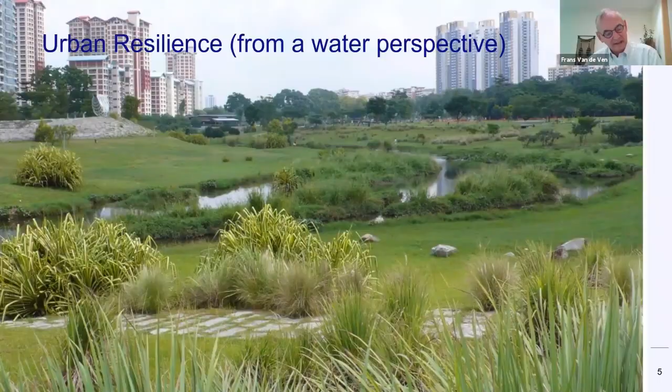Let's move on and first focus on what is urban resilience from a water perspective. Resilience in general is a wide word, but from a water perspective, it's the capability of a society to prevent or cope with the impacts of climate change, sea level rise, including its technical, institutional, economic, and cultural ability. So first of all, it focuses on climate change impacts, what is expected to happen to us. And it focuses on flood risk management, drought, water quality, the integrated design, inclusiveness. All these components are to be included in the total plan that we have to make for urban resilience.

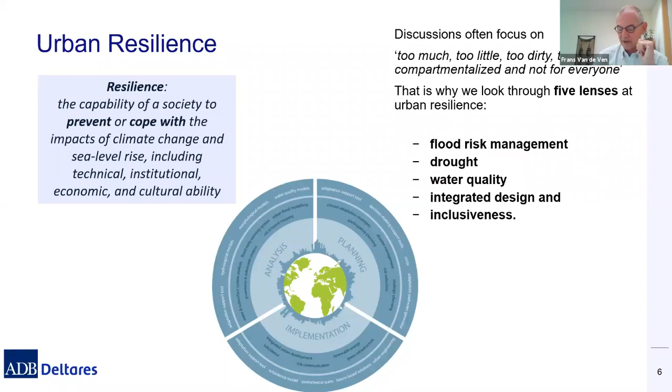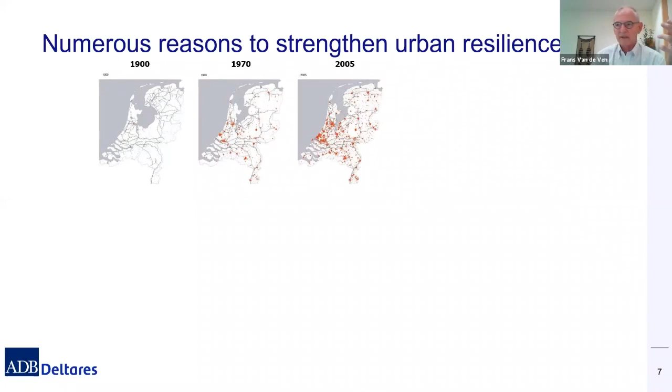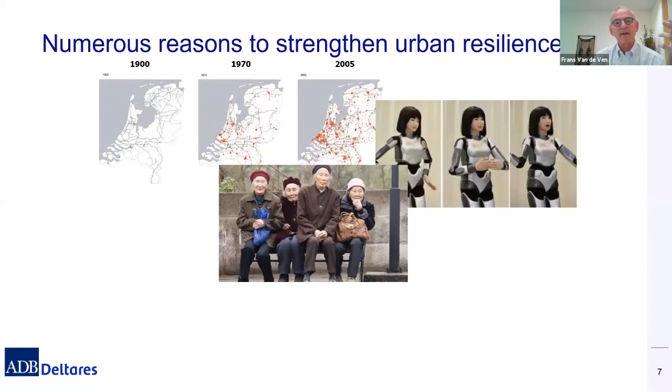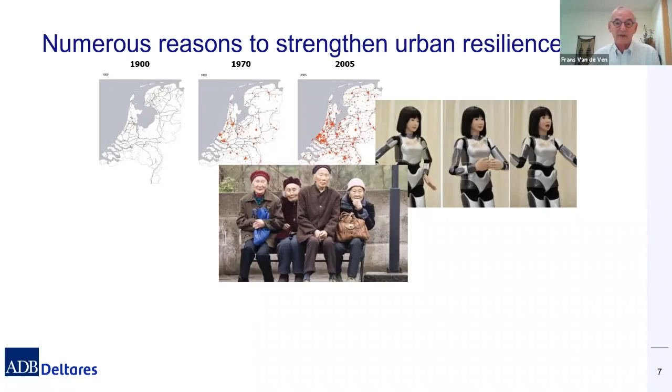But what makes urban resilience so important? Why is there a reason to strengthen that urban resilience? That, of course, starts with the whole issue of urbanization going on worldwide. Our cities are rapidly growing, but we also have an aging population to take care of - the demands will change over time. We have robotization going on in society. We're talking about smart society, about Internet of Things. That will definitely change the way we deal with our community - like this webinar is no longer a meeting in person, but it's broadcasted via Internet. We have a densification of the city going on - the city is becoming more and more dense.

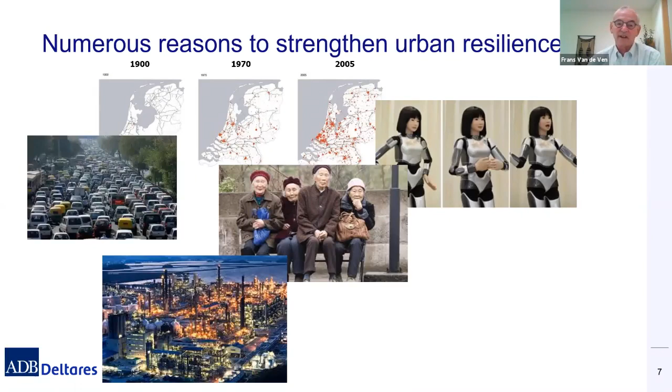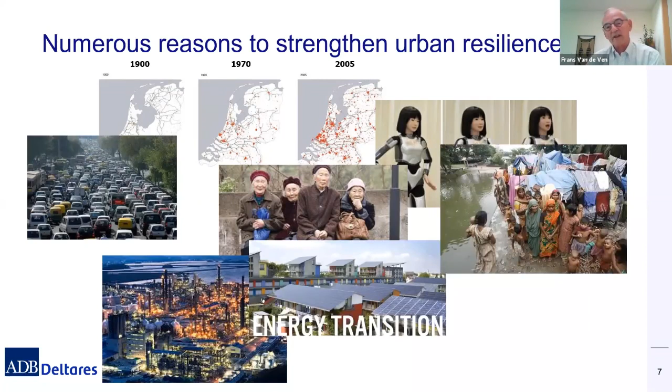To avoid urban sprawl, we start densifying our cities, but that makes the risks increase over time. Mobility is changing, as everyone knows. We have an energy transition to take care of. We have gender issues and income issues to take care of in urban resilience. And last but not least, there is a lack of money all around the world.

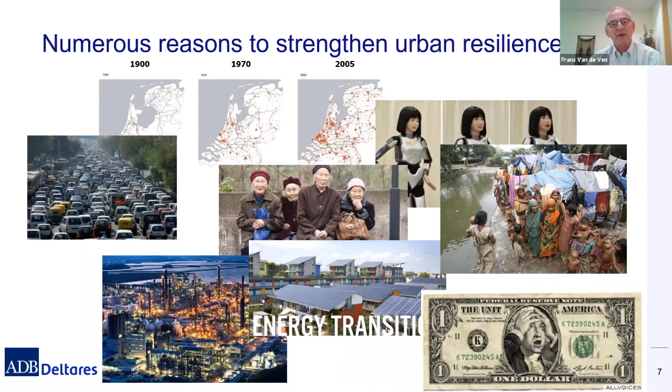The struggle for money is going on everywhere, so we have to be very careful with the budget. And of course, there is the issue of climate, not only climate change, but existing climate. We already suffer from flooding, river flooding, coastal flooding, heavy rainfall. We suffer from droughts, not only bringing dry gardens, but also threatening the stability of our levees, introducing land subsidence and so on. And we have that heat issue.

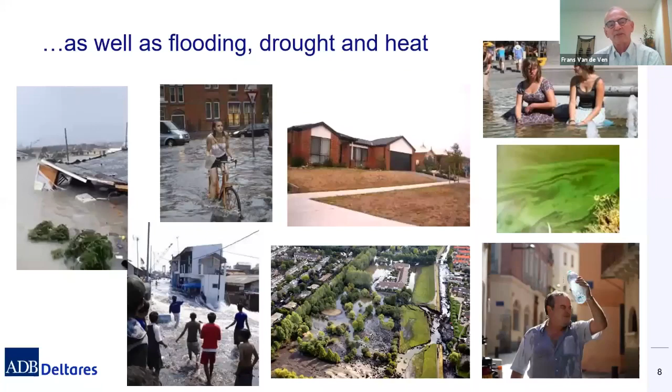That heat issue, as illustrated in a couple of pictures here, can only be dealt with if we have sufficient water to cool our cities. That water is an important coolant medium for our cities.

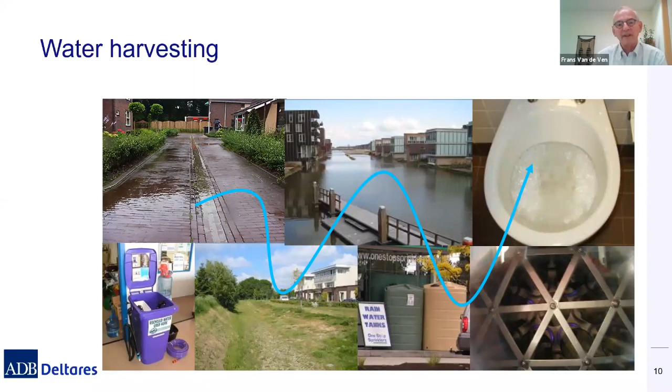But it's not only about threats and challenges that we have to talk about resilience. It's also about the opportunities to use water as a resource to improve urban resilience. To give just a couple of examples, first let's think about water harvesting, about introducing more sources than one single source of water supply from the public tap. Rainwater harvesting is becoming an issue worldwide, I think, to diversify our sources.

Then we can make better use of our water surfaces. We can build on them. We can float on them, above them. Water surfaces are not areas that you cannot use. They can be used in very different ways in the urban environment.

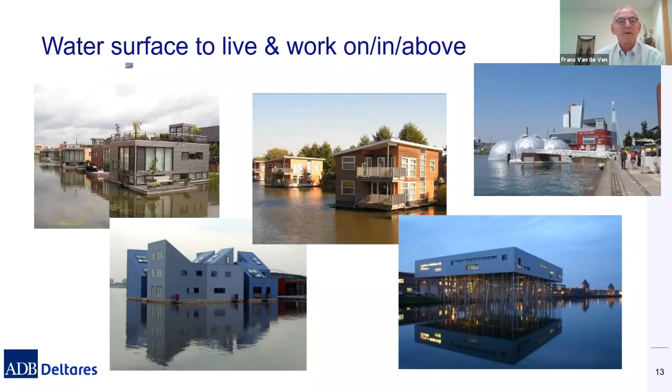Water and green are of course important for biodiversity, but can also be used for food production in our urban environment. Urban agriculture is picking up rapidly, and I think that is a way that will develop pretty fast in the next decades.

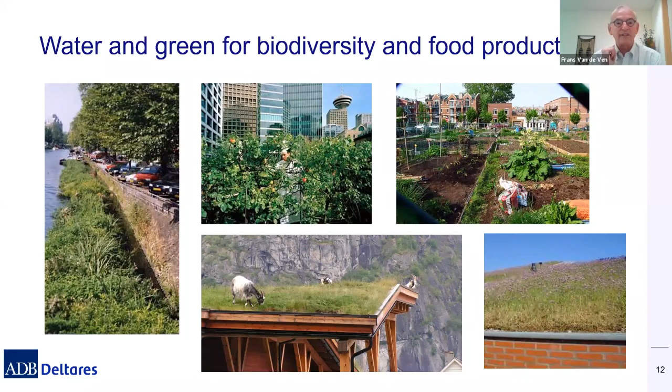Water and green is used for recreation and well-being for the people of the city. That is quite clear. Water is appreciated in the urban environment as an amenity if it is clean and accessible.

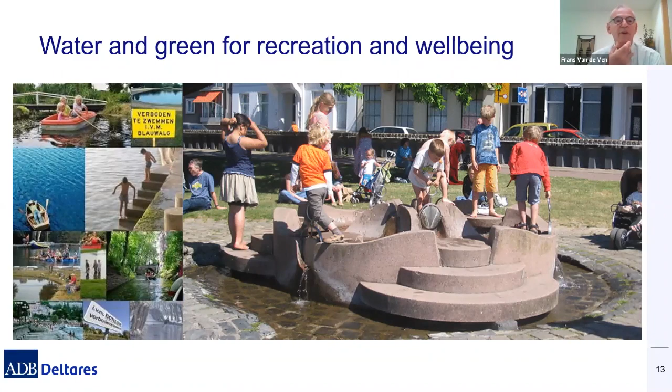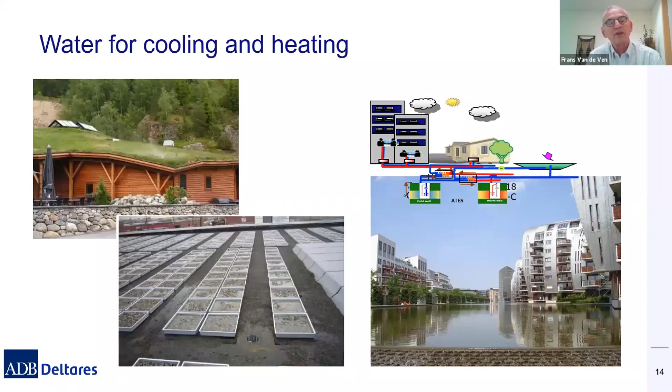So we can develop that capacity as well. And as I said, water is also a coolant for the city, so it cools the heating. But at this very same time, these water surfaces can be used as an energy collector. The water surfaces collect enormous amounts of solar heat that we can use in our urban environment for heating if necessary. All these options are possibilities to improve our resilience in our urban environment.

And that brings me to the issue of resilience planning. The resilience planning is by any means a sort of tiered approach. We have to take three steps. The first step is to scan the vulnerabilities of the urban environment.

We call that stress testing the urban environment for climate and climate change. The second step is the selection of strategies to reduce that vulnerability and to set targets. That is an important step to prepare for the last step. And the last step is this, to select the adaptation measures in our environment. I will briefly walk through these three steps, focusing on step number three.

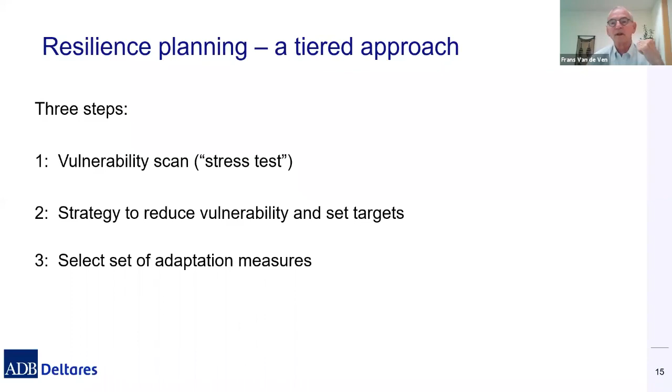In step number one, we have to include issues like flood hazard assessment, to see where the hazards are, where the city is exposed to these hazards, where the risks are, the sensitive objects, where the vulnerabilities are. This is the type of analysis to be made in step number one, to make a complete overview of all the vulnerabilities. This is to be done for flooding, but also for drought and for heat stress, and maybe for land subsidence, so also for the other issues at stake in the physical environment of our urban areas.

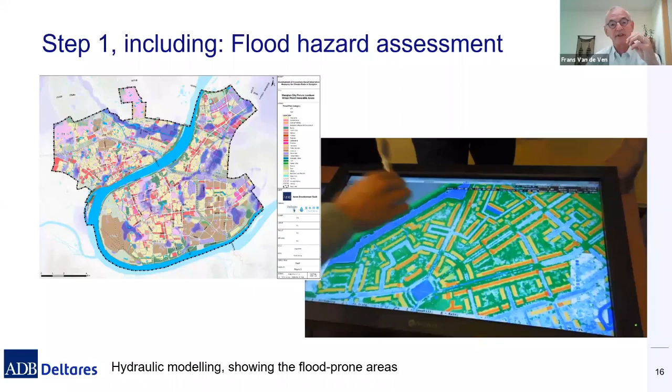Moreover, we have to take a look at the soft side of the urban environment, the governance and institutional arrangements, to see where the weaknesses are in these institutional issues. This could be done, for example, by analyzing the so-called PRIMO chain, making an analysis of existing policies, existing regulatory frameworks, the capacity to implement solutions, to maintain solutions, and the organization and financing. This is called the chain approach because the chain is as strong as its weakest link, as we know. So if one of these links is weak, we will have a problem introducing these solutions.

Then it comes to strategy, and one of the first steps in strategy that we are all very much aware of is the fact that nowadays we have to retain and store the water instead of draining it. The Chinese term 'sponge city approach' is very well known. We need a sponge capacity to avoid areas being flooded. Water is to be retained and detained where it comes from the sky and stored locally, so that we don't need to drain it right away, and so that we can avoid large flood peaks in our river systems.

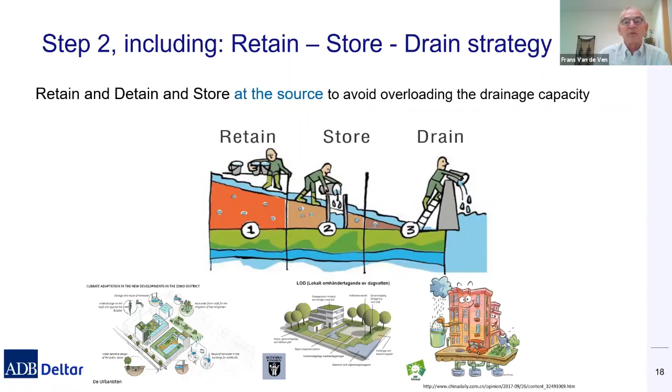But okay, that is an important strategic component: retain and store before draining it. And that brings us to, in the Netherlands, what we call the multi-level protection strategy.

At level 1, we need strong levees, strong dikes to protect us from the rivers and from the coasts in our delta areas. But that is not enough. The fact that we create this levee system also introduces an inland area that is like a bathtub, and if it's raining heavily, that bathtub will fill up. So we need measures to avoid flooding in these lowland areas, and that's why we need flood-robust spatial planning. In addition, at level 3 we need flood warning and emergency plans to prepare for anything that could happen to us.

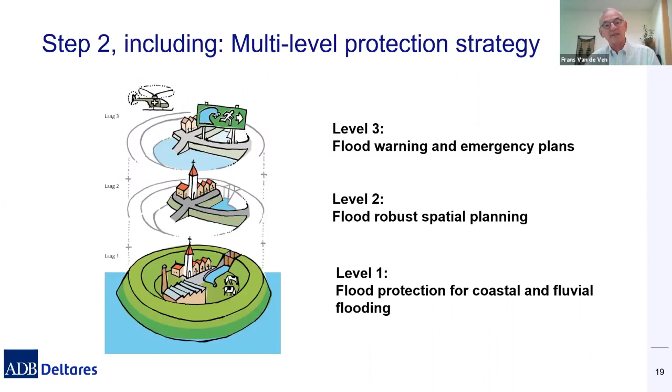Then we need a so-called 3-point approach for resilience, and this is, I think, a very important step as compared to the past. In the past, we made an analysis of what was needed with a certain return period. And as a hydrologist, as a hydraulic engineer, we made a design for a levee or a pumping station or whatever was needed to protect us up to that certain level—up to once in 10 years, once in 100 years flood, whatever.

But two more points are very important. The second point happens 365 times per year—that is the everyday situation. If your solution that you have designed for this extreme situation is not contributing to everyday value, well, that is a missed opportunity. So we should develop solutions that also contribute to the value of the urban environment every day.

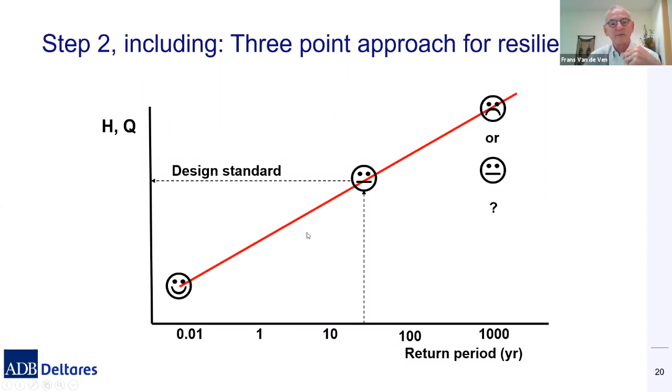The third point is another issue: it's clear that every now and then, whatever design we make, this criteria will be exceeded. So if you design for a once in 100-year flood, and the once in 200-year flood comes in, your system is allowed to fail. When it fails, we should of course minimize the damage of that failing system. That is the other challenge we have to take care of, and that is one of the strategies—to make our design so that we minimize the damage of that failing system. This is the so-called three-point approach for urban resilience.

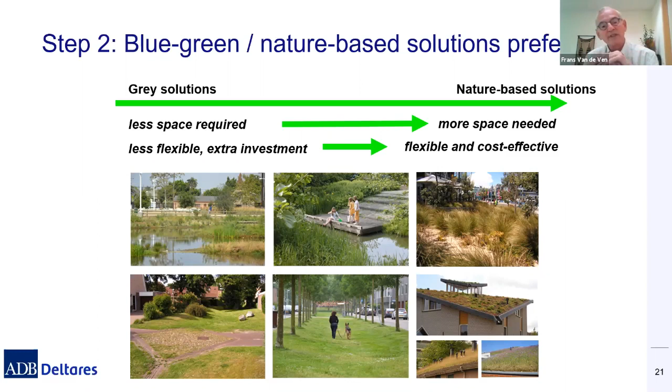And last but not least, the last component I would like to bring up is the movement we see from traditional gray, underground, invisible solutions to nature-based solutions in the urban environment. Let's be honest, if you see these pictures, it needs no explanation why these solutions are attractive to the urban environment. They create extra value to this urban environment on the everyday situation. They are more flexible and turn out to be cost effective, despite the fact that they need more space—they take urban space.

So this is a movement that we have to consider when we move to our next step. And the next step was that adaptation planning. Well, in that adaptation planning, we first of all have a problem to deal with, and that problem is the fact that we have simply too many solutions.

It's not the problem that we have no solutions in climate resilience—it is the problem that we have many solutions, many blue, green, and gray solutions available. Whether you call them ecosystem-based adaptation, nature-based solutions, sustainable urban drainage systems, whatever you call them, the problem is we have to make a choice. And to make a choice, we have to take into consideration very many disciplines and aspects when implementing these solutions.

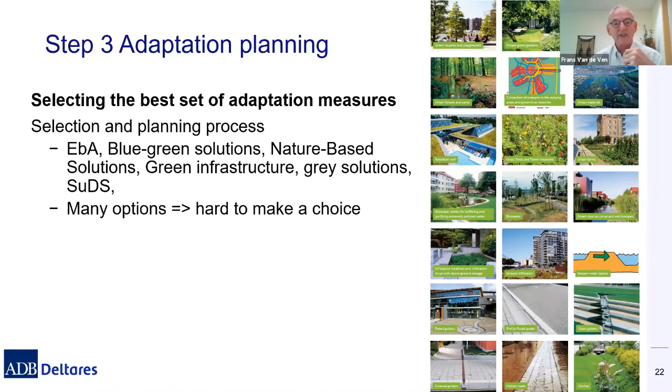So it's quite hard to make an evaluated choice, and in that context we need collaborative planning. We need the co-design of solutions. As you can imagine, these blue-green solutions require many different fields of expertise—urban planners, drainage experts, landscape designers, project developers. Everyone has a say and has to have a say in the design of these solutions.

The more so because all these stakeholders have to support the plan that is to be developed and implemented in the end. Such solutions, as a result, will be very location specific. It depends on local knowledge and local preferences what will be implemented in practice. The solution for city A can be completely different than the solution for city B.

Moreover, the discussions we have during that collaborative planning process tend to focus on the opportunities and the benefits and the co-benefits of these specific interventions rather than on the cost. So there is a balanced discussion about not only the cost of these interventions, but also the opportunities, benefits, and co-benefits. And indeed, during these discussions, the benefits are maximized while the risks are minimized—and maximizing the benefits is a very important step to take in this discussion.

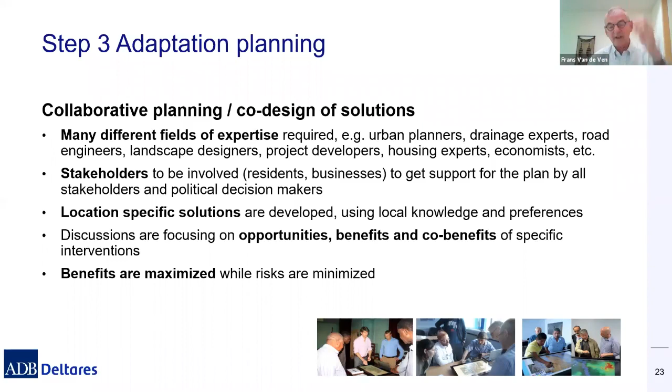So when it comes to planning support tools, we should have tools that facilitate and structure the discussions among all these experts and stakeholders, the local representatives, and how to organize that process. Moreover, it should fit the structure of our planning and design process, which is often even a legal structure. In general, this is characterized by an initiative phase and a design phase: the initiative phase ending with the program of demands, and the design phase starting with the conceptual design and then finally moving towards the final design ready for implementation.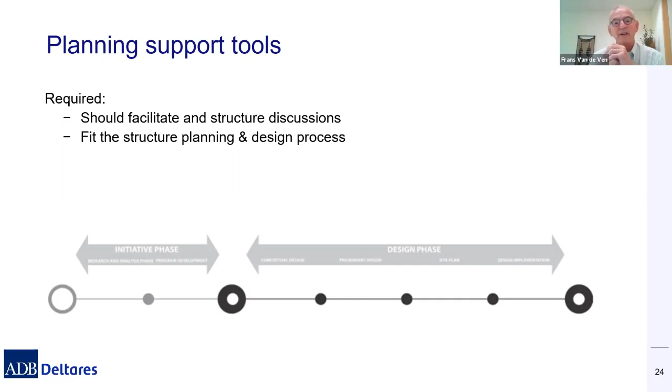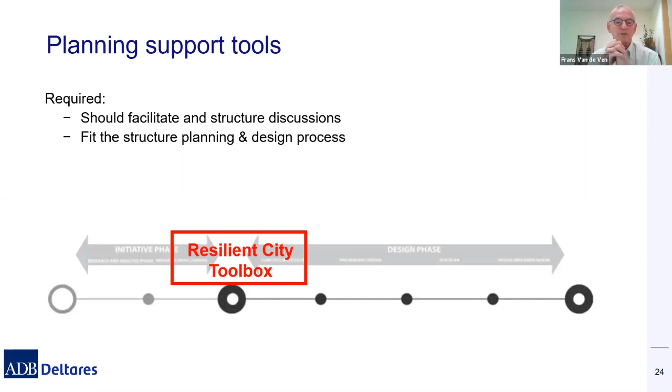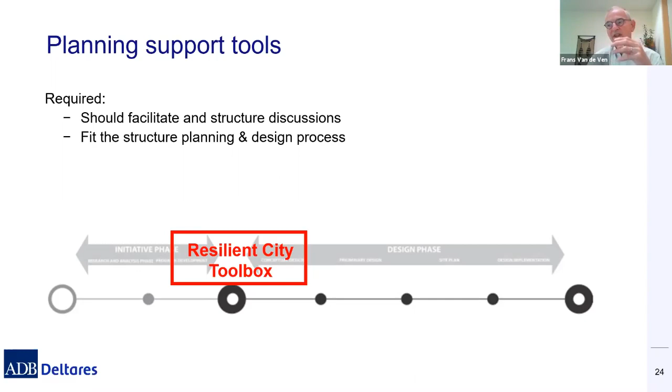And this is precisely where the Resilient City Toolbox comes in. At the end of the formulation of the program of demands and at the beginning of the conceptual design, that is the moment that people can sit together and discuss options and opportunities. That is precisely what the Resilient City Toolbox is meant for. The output of the toolbox is input for the further design phase, for the detailed design.

So asking yourself the question, what is the Resilient City Toolbox meant for? Well, it is, first of all, meant to support the dialogue with all the stakeholders, the experts, the local representatives, the financers, the constructors, about the options and alternatives. Which measures can be implemented where and how? That is the key question we would like to answer in using the toolbox.

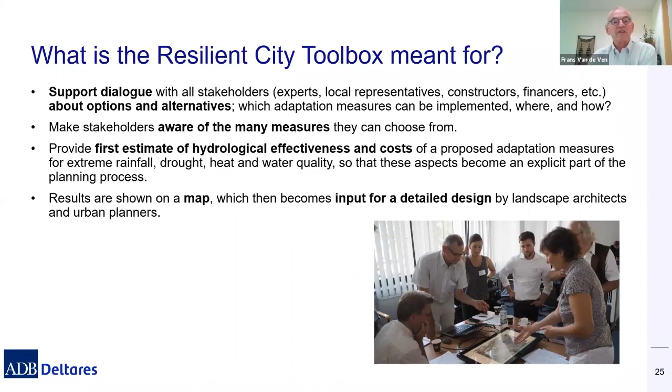The toolbox provides first estimates of the hydrological effectiveness and the costs of the measures. These are first estimates, enough for this preliminary phase of design, though not sufficient for the later phase of design, but it gives you an opportunity to discuss the pros and cons of different alternatives. The results are shown on a map, and the people are contributing to that map to see what can be done where in that area.

The structure of the toolbox is such that it's built up first with a measure selection assistant, which evaluates the applicability of the different solutions in a specific area given the conditions in that project area. The next step is an effectiveness assessment tool, as we will see, to evaluate what we are projecting in that specific project area.

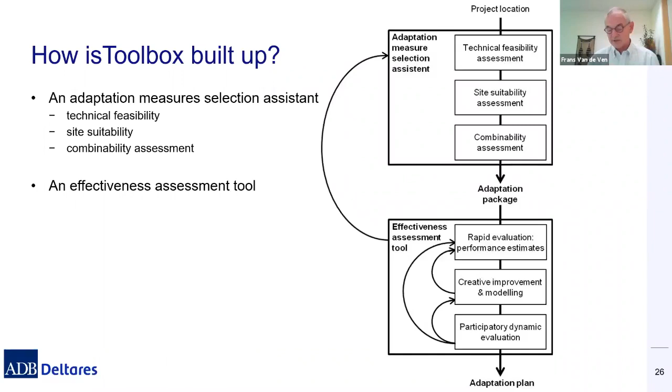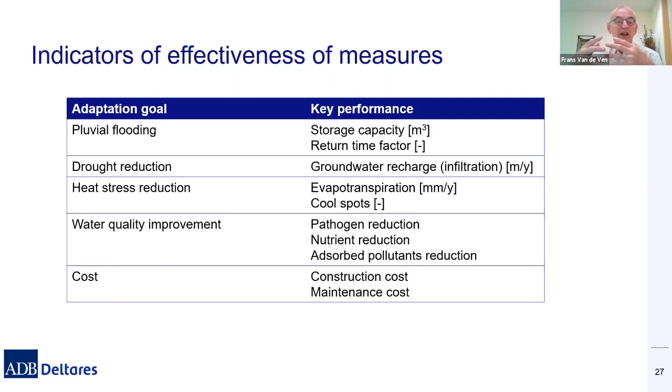Indicators of the effectiveness of the measures are, for pluvial flooding, first of all that retention capacity, that sponge capacity that is needed, quite crucial in our thinking. But also a return time factor for peak flow reduction is important. For drought reduction, we included groundwater recharge as a metric. For heat stress reduction, it is evapotranspiration, annual evapotranspiration estimates, and the number of cool spots, and moreover some estimates on water quality improvements, and last but not least, very preliminary estimates of the costs of construction and maintenance are included.

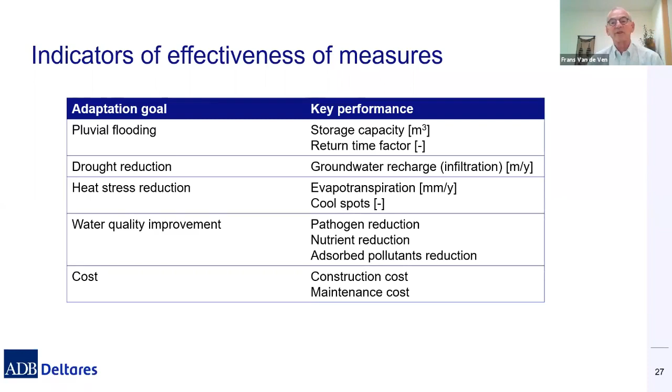So these are the metrics, and the hydrological metrics are calculated using a simplified model—not a complex hydraulic model, but an urban water balance model, a multi-reservoir model that takes into consideration the hydrological conditions in the project area: how much area is paved, how much is unpaved, what type of area is there. We run long time simulations, and then we can estimate what the effectiveness of the different measures is.

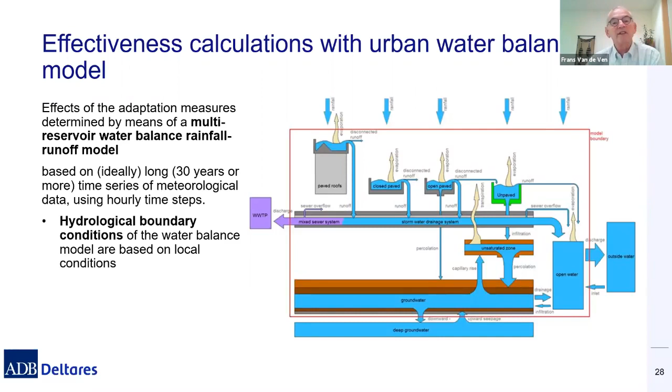But we also need this model to estimate how much sponge capacity is needed in that project area. By having access to the land use data, a long series of rainfall data, evaporation, and climate change assumptions, and that urban water balance model, we can calculate the relationship between the discharge capacity that could be available in a specific area and the storage capacity that is required. Well, of course, the more you can discharge, the less you have to store. But that discharge capacity tends to be limited because you will simply flood downstream residents or downstream cities if you discharge too much.

And one of the principles in hydrology is: never shift problems. If you don't want to shift problems, you have to limit your discharge capacity to your downstream neighbors. So that brings us to the need for storage capacity as shown in this graph.

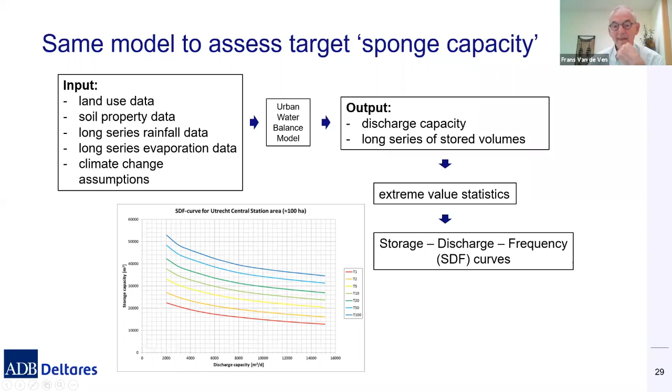Now let me do something very dangerous, and that is switch to the other presentation. Let's see what is happening. I have problems with the bar here. Yep, I hope you can see this, the Yangon training area now. Can you? Yes, I can confirm that.

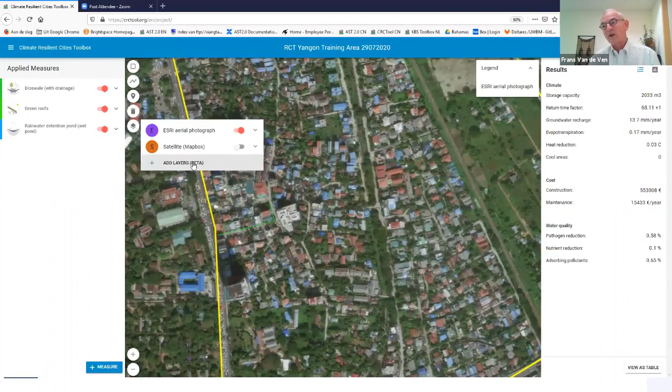Let me first push this button - this is the layers button. Here you can see we have this aerial photograph visible now. We have a satellite image we can switch on, but we can also add layers. Normally we add layers like the flood hazard map, the drought stress map, the land subsidence map, or the digital elevation map - all included in this list, but we can add layers if available. Another issue is this aerial picture needs high resolution, because we would like to zoom in quite close so we can really look in someone's backyard to see what can be done there.

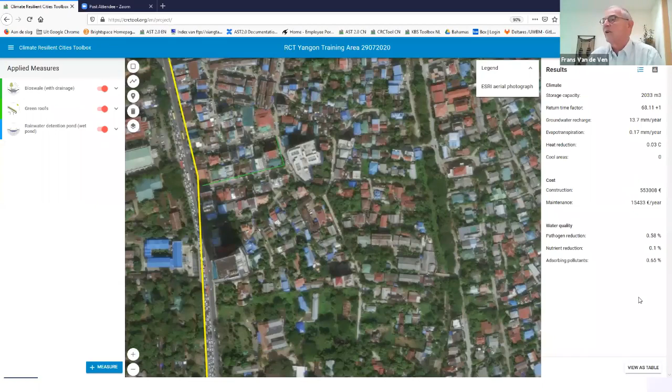That's this button. If we go to the measures, what we see to the left are the applied measures in that specific area. We can see a bioswale here, and there was a green roof and a wet pond. This is my project area where I can zoom in and out, and this is the results screen to the right, with the indicators and metrics shown in this study.

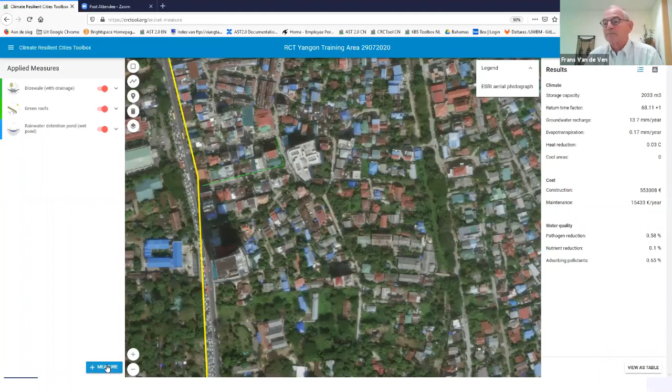Suppose I would like to add a measure. I push the measure button, and now I have an overview of the measures I can choose from. As you can see, there's a long list of measures, and if you don't know what a water square is, for example, you can push the Learn More button. It shows you background information on what the water square could look like, giving an impression in words and images. This is available for all the measures included in the toolbox.

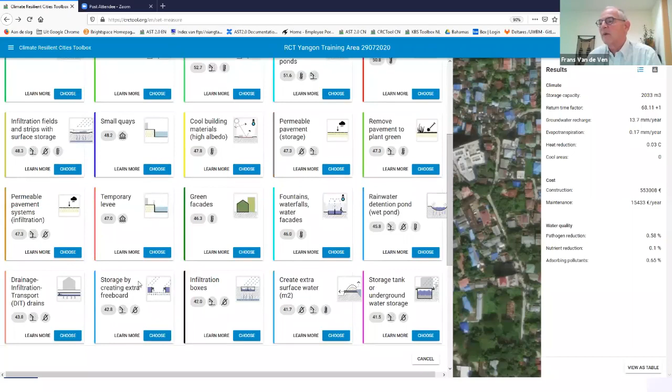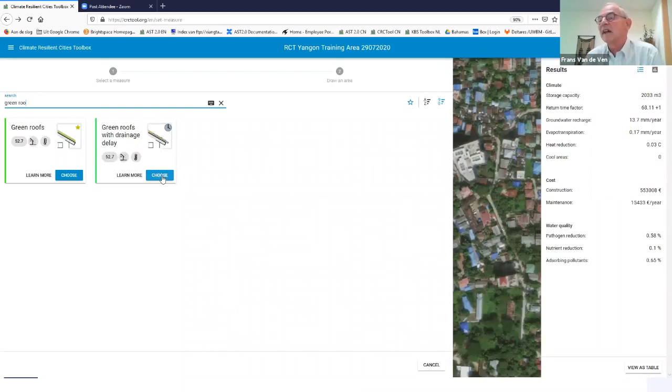Suppose there was a nice roof I had in mind, and I want to go for a green roof with drainage delay in that specific area. So I say choose. What I have to do now is indicate the area where I could put the green roof, and this is an areal element I'm going to add now. So I can just click the corners of this roof. Double click finishes it, and what it says now is you selected the green roof for this building. The default water storage is 10 centimeters, but I could increase that if I like. And of course the inflow area is 1. So if I push the Done button, this solution - green roofs with drainage delay - is now included in my solution package.

Similarly, I have linear elements that I can include. Let's go for a bioswale somewhere.

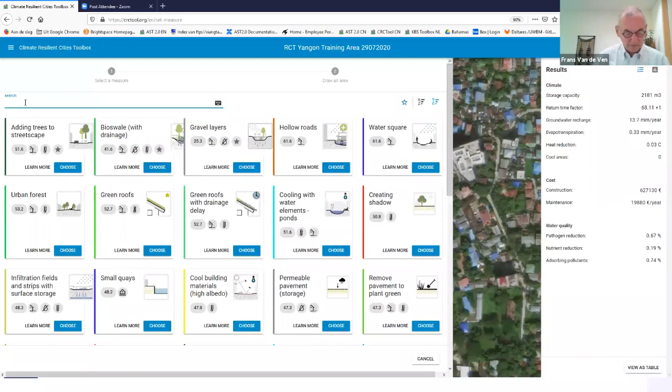I can imagine that you draw a bioswale here. Then I could introduce a linear element, say, I want to introduce a bioswale from here to there. Well, now I'm doing this on a screen, but normally this is done on a touch table, put on a table that people can stand around, that we can have a discussion on what solution to put where.

The water storage depth default is 35 centimeters, the inflow area 10, and the width of 1 meter. Now let's make it a wider bioswale, and push the Done button.

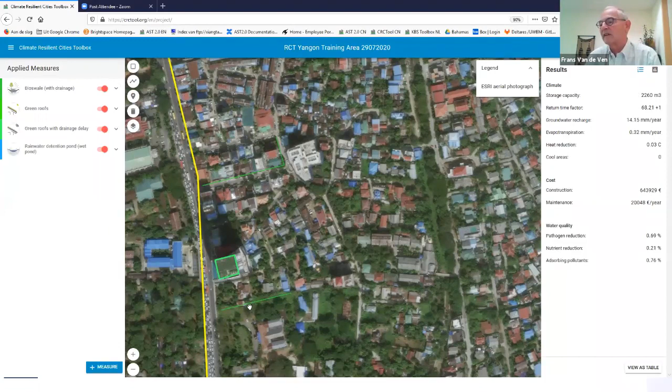In the meantime, you see that the figures in the results screen are changing. And if I want to know what my bioswale is doing, I can click on this. And now I can see that my bioswale created almost 79 cubic meters of storage.

It has effects on the return time factor, the groundwater recharge, the evaporation, etc. There's a cost estimate here. As I said, it's all estimated now on Dutch cost prices, so it's highly irrelevant for Yangon, but this is the way the tool works.

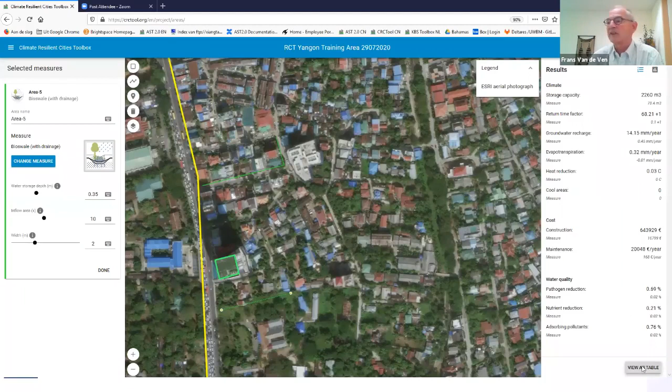And well, all the measures have an effect on water quality parameters. I could also show this as a table with an overview of all the results of the measures, etc.

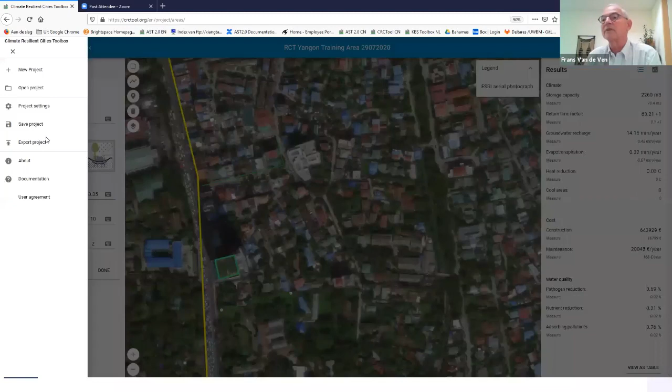Now let's move to the very beginning of the tool. I have to hurry. This is a way to switch from project to project. We can also start a new project. If you want to go to Manila, I could simply ask for Manila, and we can start opening a project in Manila. But this is a way the area can be used.

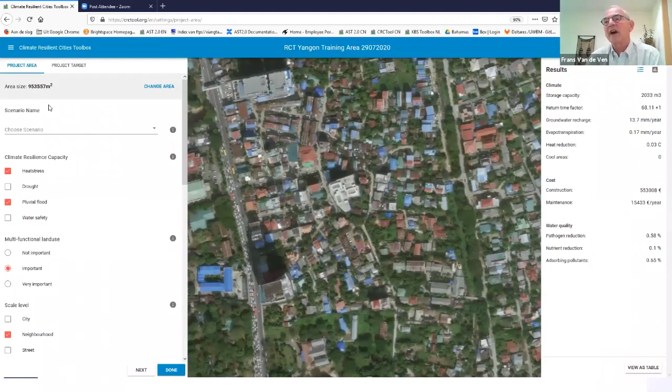That project again to demonstrate something else. Back in Yangon, I can also go to my project settings. This is the first step you take when entering a project. You have to give in the project area, and then you have to fill in a number of properties from the project area. When that is done, you can go to setting the project targets.

And the project targets, like storage capacity or return time factor, you can fill in any value you want here as the target that you would like to achieve, so that the target can be compared to the realized value here in your right panel.

And we can also illustrate that in a more graphical way by putting it in bars. Personally, I prefer the numbers, but I'm an engineer, so this is the way to introduce targets, and we can toggle these targets on and off if you like. Whatever is relevant, we can include them.

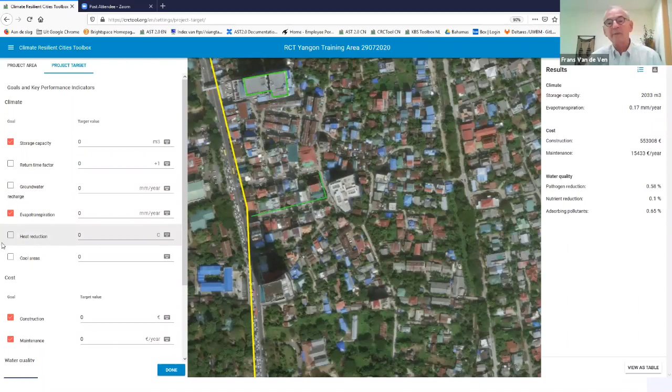So this is a brief demonstration of the tool. And let me conclude by briefly showing a couple of applications. I'm running out of time, as I see.

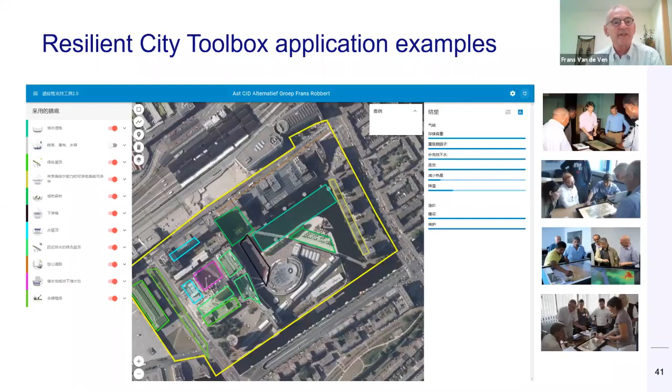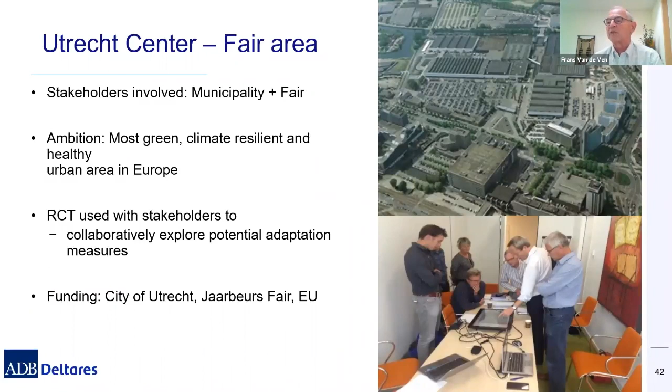Well, as I said, there was a large application in the city of Utrecht, in a fair area where we used the tool with many stakeholders to explore potential adaptation options. We used that same tool and the water balance model to analyze the water balance and to see where changes in the flows would be needed.

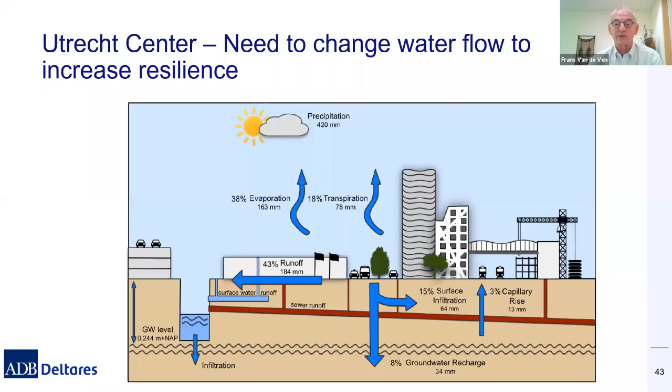It was a very densely urbanized area with hardly any infiltration. So the question was, could we reintroduce groundwater recharge there? Well, we started developing solutions with the toolbox, as you have seen, and we drafted a number of alternative solutions.

With the team, the team started comparing different options, different alternative solutions, to find out what was the best way to go. They had very good discussions once they had developed a couple of alternative plans for that specific area. And currently they are really building that lower right corner building as one of the buildings part of the area.

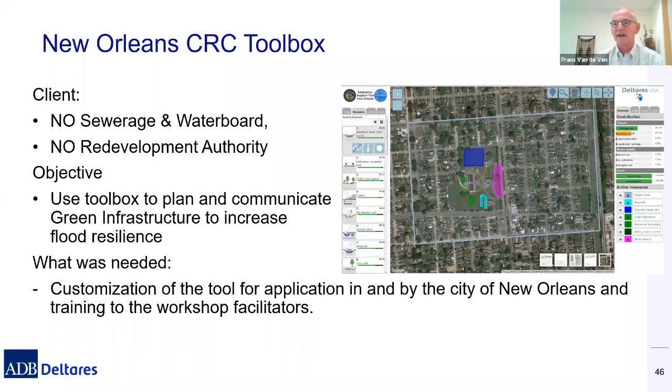Another application that is relevant is in New Orleans. We delivered a customized version of the toolbox to the city of New Orleans for their stakeholder engagement meetings. We had very intensive discussions with the stakeholders, and we trained the facilitators in New Orleans so that they can have their own sessions with facilitators on what could be done where in the area, so as to have wide support for all the solutions that are taken.

And last but not least, an application for the Asian Development Bank for the Xiangtan city in Hunan province in China. We developed a Chinese version and I customized that version for Xiangtan in China and applied that for both retrofitting blue-green measures in the existing urban environment, as well as for a new built hospital area that is projected now, where a lot of retention had to be created.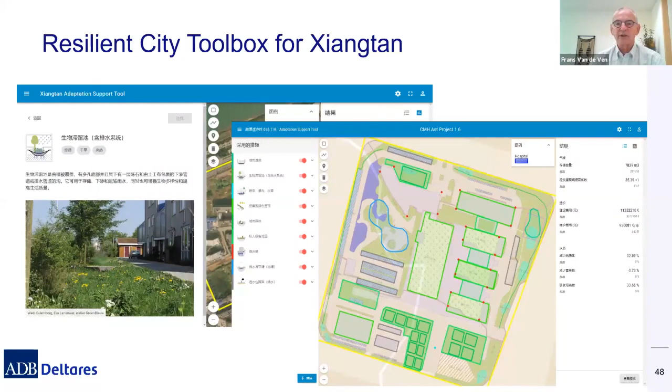But once you stand around the table, you can have a good discussion with all the participants on what would be feasible and what is unfeasible in a specific area. And that is precisely what the toolbox is meant for.

Well, to conclude, some background information. The public wiki contains very extensive descriptions on how the calculations are made and all the background information. And further, some publications issued over the past couple of years. Sadie McEvoy did her PhD thesis, and published 3 or 4 articles on the toolbox now, on all the practicalities and the applicability and the pros and cons and the best ways to do it. So if you want to know all the background information, a lot can be found in there.

Well, thank you very much for listening, and I'm looking forward to answering your questions.

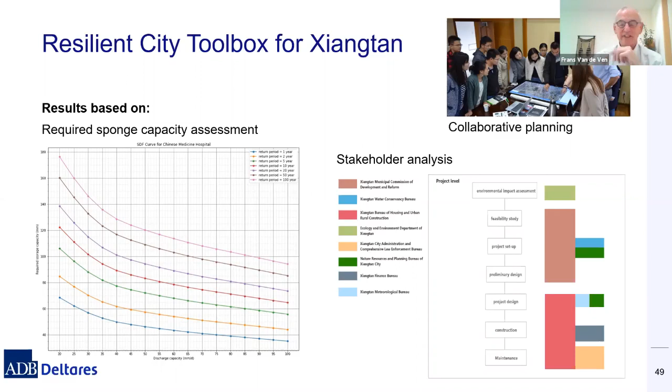There are many possible futures considering, for example, climate change and urbanization. How does the Climate Resilient City Toolbox address these many possible futures? Thank you, in two ways. First of all, I already showed the storage discharge frequency curves. You can imagine that you run different future climate scenarios to calculate these curves under different scenarios. That's what we did basically in Xiangtan, to see how sensitive the storage demand is given the uncertainty in climate change. That is one. Of course, there's also uncertainty in the urbanization pattern. You can take that into consideration in your urban water balance model as well to set the criteria. And last but not least, this uncertainty is of course a subject of the dialogue that takes place over the table. So that is another reason to develop different alternative plans, to see what is the most flexible solution for the future.